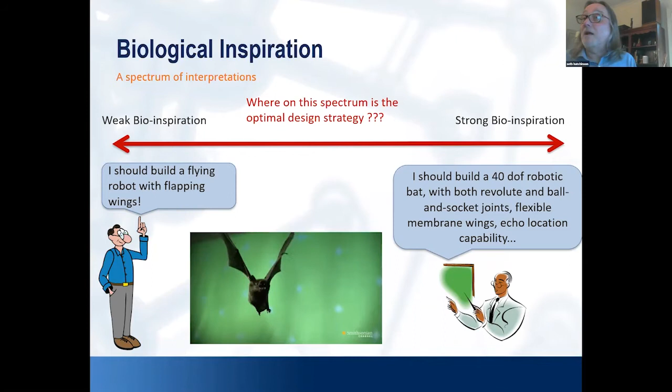At the other end of that spectrum, you have people who are very serious about the biological motivations. People who are studying the animals very closely, maybe even dissecting animals to look at the specifics of bone structures and musculoskeletal connections and how all these things go together to make the biological system work, and who try to replicate that. Right? So you have people that are working on robots that have muscle systems that are meant to mimic physical muscle systems. Quite often this is done with pneumatic actuators, for example. So you can place yourself anywhere on this spectrum, from very strong to very weak bioinspiration.

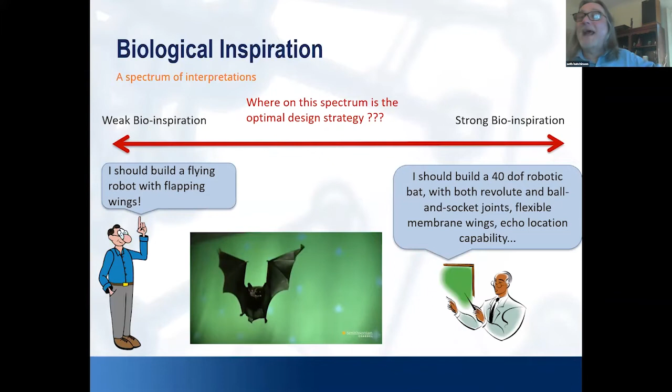And the question that comes up, I think that's interesting, is where should you be on this spectrum? Right? At what point should you move away from looking at the animal and start thinking about engineering? Or should you ever do that, right? Should you focus on the animal and its capabilities and its biological and mechanical structure all the way to the end? So this is how we looked at the problem for this biologically inspired robot bat.

It was first to step back and ask, you know, what are the right questions, right? What should we even be asking about when we look at the biological creature? And here are the first couple of questions, right? Should we try and really build a robot that is a replica of the biological animal? Or should we abstract away a lot of the details of the bat very quickly to a simpler kind of mechanical structure? And this raises immediately the question, well, then what are the salient features of bat-like flight, right? If you want to capture this kind of behavior, what are the right features to look at?

A question that I thought would be really important, and it is important, but not nearly as important as I expected it to be, is what's the role of geometry versus dynamics? And the question that I thought would be really interesting is, can you do flapping flight based purely on the geometrical structure of the robot and the wings and the trajectory? Can we ignore dynamics? If I study bats as they fly, and if I really understand the geometry of what's happening in the bat wings and the bat body and the trajectory of the body, is that enough? Or do I need to worry about the Lagrangian dynamics, right?

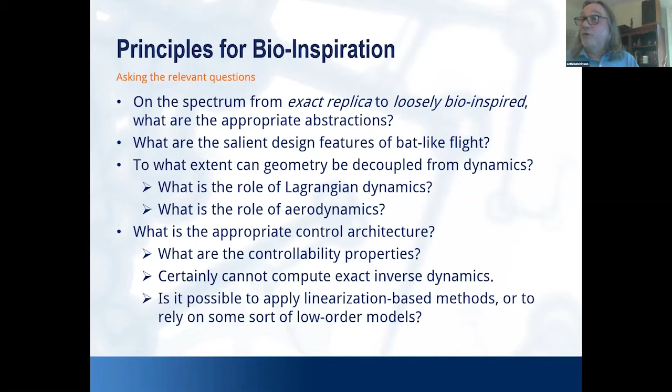And there are a few things that are obvious just at a first passing thought, right? You don't have to think very deeply to realize that you will not be able to do real-time control with exact inverse dynamics, right? You won't be able to solve the inverse aerodynamic problem in real time. So can you cheat, basically? Can you do the kind of cheating that control theorists do? For example, can you do linearizations that will get you closer to the kind of control that you need to get the behavior that you want?

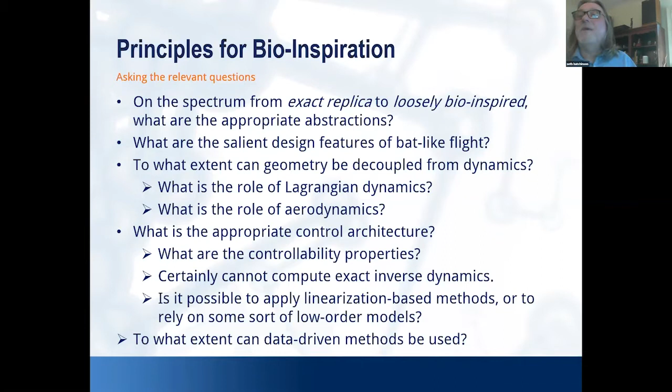And then finally, what about data? Data has been, in the last 5 years, finding its way into robotics quite a lot. In fact, if you look at the topics that are discussed at ICRA last week, it's not the #1 topic, but I think it's number 2, 3, and 4, the topics that are related to machine learning in their different manifestations. And so how can we do learning on the physical system, the biological system rather, to inform the robotic design and the robotic control? And this is the way I'm going to approach those questions in this talk.

So I'm going to begin just by looking at the bat, and by the bat, I mean the physical animal as it flies. What can we learn? What can we infer from looking at the physical animal? From that, I will posit some constraints on the design, and in particular, some constraints on the topological structure of the design. Once we settle on a topological structure, then there are questions about what should be the design parameters, right? What should be the values of the various kinematic parameters that go with the topological structure? Then once you have that, how do you optimize trajectories, taking into account aerodynamics, and then the control design?

Some extra stuff if we have time to talk about how we did a little bit of extra machine learning stuff on the back end to improve all that. But we'll see if we have time for that.

I seem to be rambling more than usual, so we may run out of time early today.

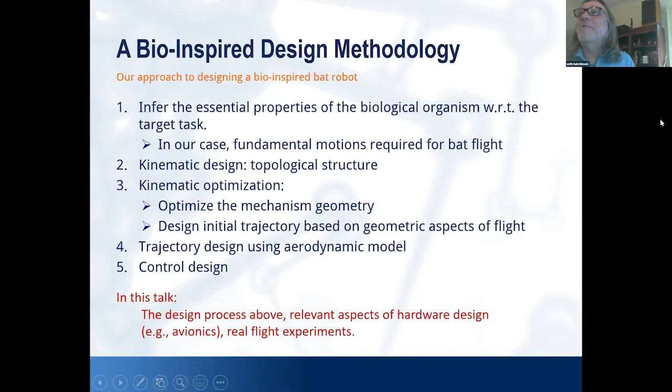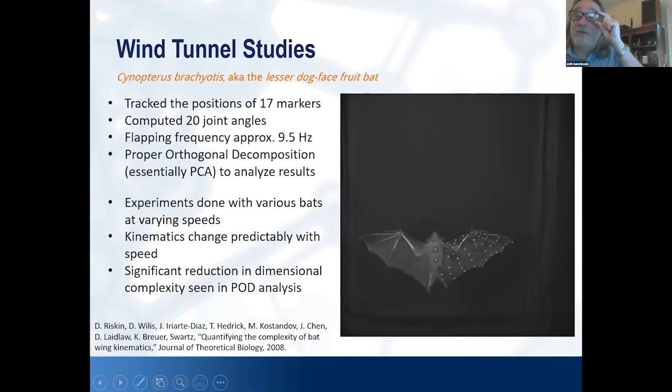And you put this into a wind tunnel with a motion capture system, and you collect data of the bat flying in the wind tunnel. And in this case, I think they used 17 markers, computed some inverse kinematics to get joint angles for the joints in the skeletal structure. The flapping frequency was about 10 hertz, 9.5 hertz, it says here. And then they did a principal component analysis. They call it proper orthogonal decomposition, but to us, it's more familiar as principal components analysis, to figure out what's happening with this bat as it flies.

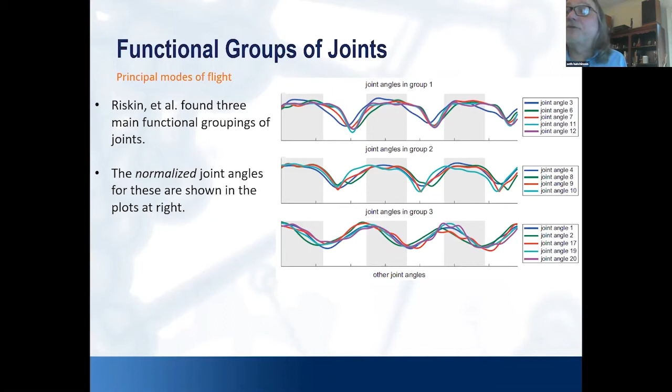And this is the data that comes out. This is not exactly true. When you look at these 3 plots, everything looks so perfect. In fact, to get these plots to look so perfect, you have to do some normalization, you have to do some phase shifting and so forth to get things to line up visually. But what comes out very quickly from the PCA is that there are really only 3 kinds of interesting things that are happening when this bat flies.

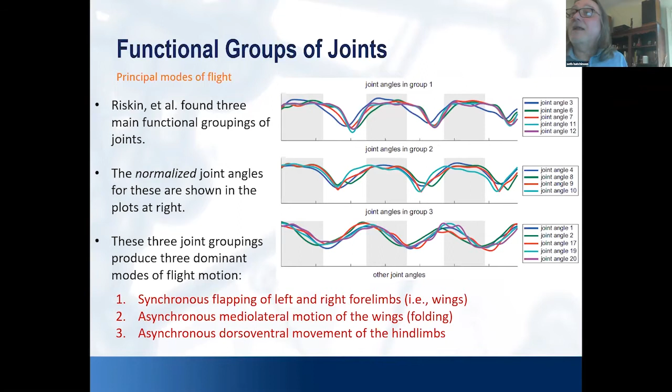There's synchronous flapping of the left and right wings. There's some asynchronous mediolateral motion, which basically means the wings fold in and out, right? So I don't know if you can see my arm well, but you get this folding motion of the wings. And then finally, the tail, the hind limbs move independently. So this is it. Everything that's interesting about the wing structure of the bat can be grouped into one of these 3 kinds of motion. And if you start there, you're now in a position to think about what should be the topology of the kinematic structure of a robot if the robot is meant to replicate these 3 kinds of motion.

And so the challenge is this: replicate those 3 kinds of motion, synchronous flapping, wing folding, dorsoventral leg movement, but with a lot of constraints. And the constraints are hard for engineers. Low weight, low power consumption, small size, structural stability. And basically the hardest things about this design come from the fact that when you throw it into the air, it should fly by flapping its wings. If it's going to fly by flapping its wings, if you know much about aerodynamics and Reynolds numbers and this sort of thing, it means it can't be very large.

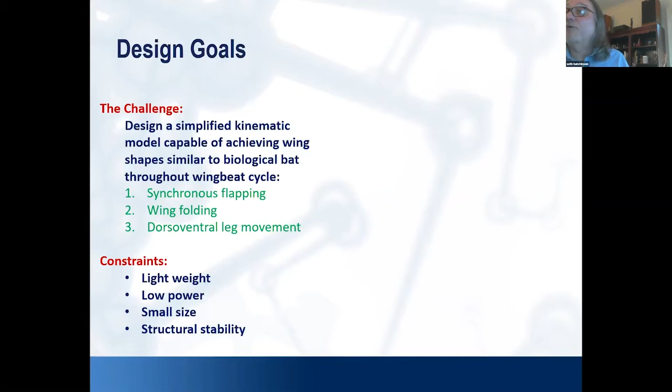If you don't want it to fall out of the sky, it can't be very heavy. It has to be low power because it has to carry its own power source with it. And if you have to put a giant battery on it, then there's no way for it to fly. And then finally, all these things fight against the structural stability, right? So when you flap the wings, you don't want them to break, right? You want them to be able to withstand whatever aerodynamic forces are applied when the flapping occurs.

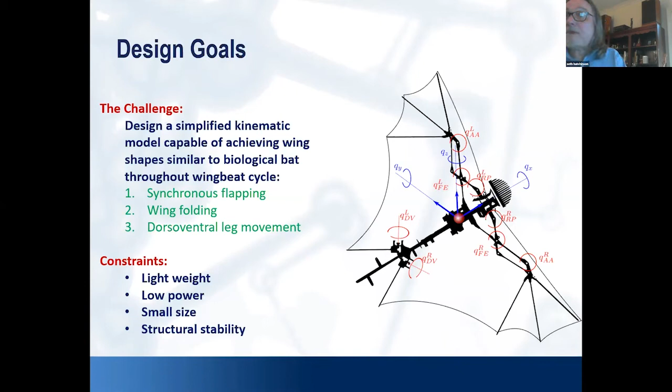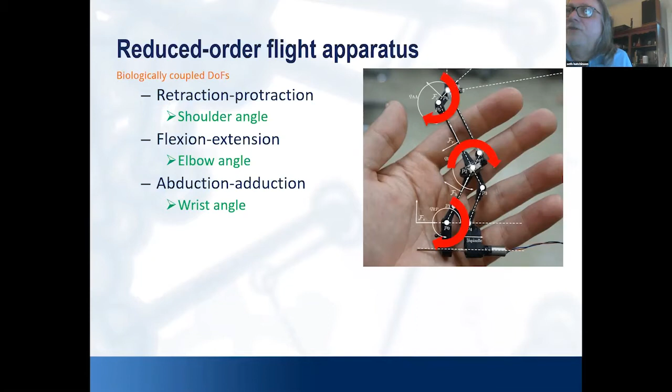This is what the structure looks like that we arrived at, right? So this is an a posteriori look back at the design that came out after some trial and error. The mechanical version of that is here. This is a Watt mechanism that you see. Basically, these 3 degrees of freedom are coupled so that when this linear actuator moves back and forth, these 3 revolute joints move in response as shown. And this gives us a way to fold the wing and the fingers in and out, coupled together, right?

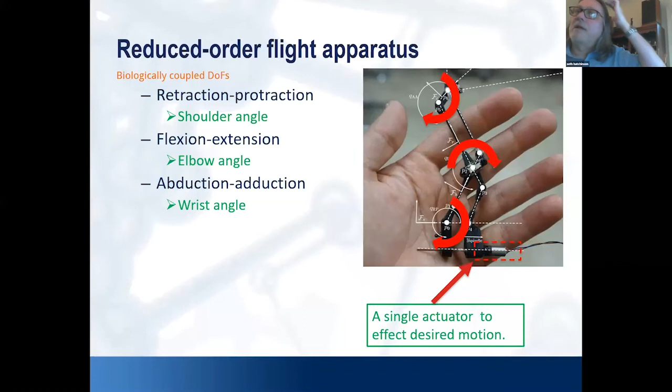So this captures the tight coupling that you saw a few slides ago. That really there's only 1 degree of freedom happening when this robot folds in and out. Can we build that into the mechanical structure? The answer is yes, and here's a mechanism that does that. This 6-bar linkage that you see is called a Watt mechanism.

It's a parallel mechanism, and the reason it's nice is the fact that it is a parallel mechanism, and that gives it structural stability to support forces perpendicular to the wing, right? So when the air pushes up, this parallel mechanism is able to resist that, and it doesn't bend or break. It's all done with carbon fiber tubes to get extra structural strength.

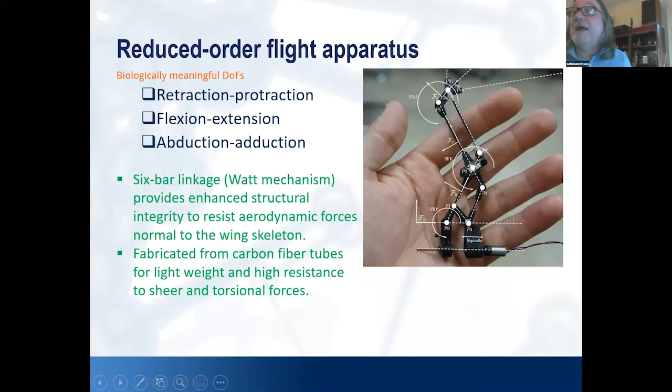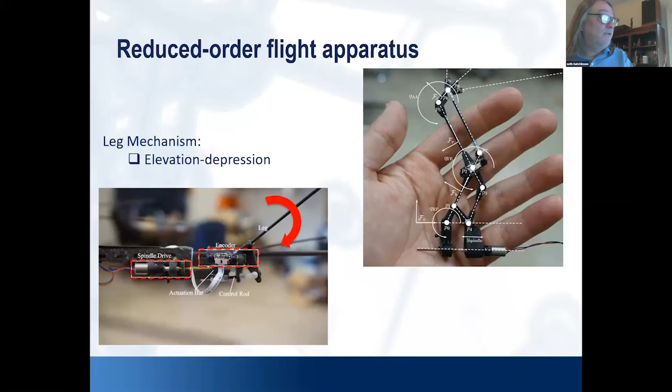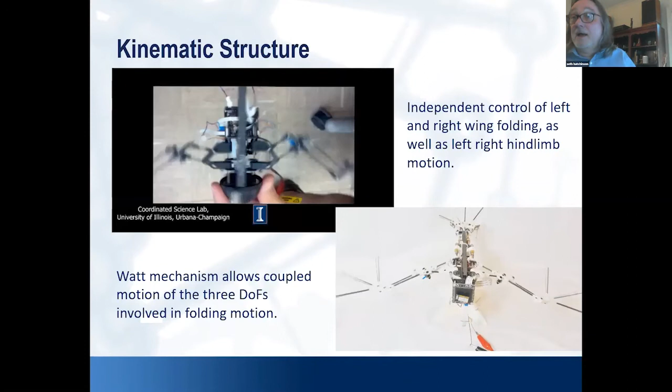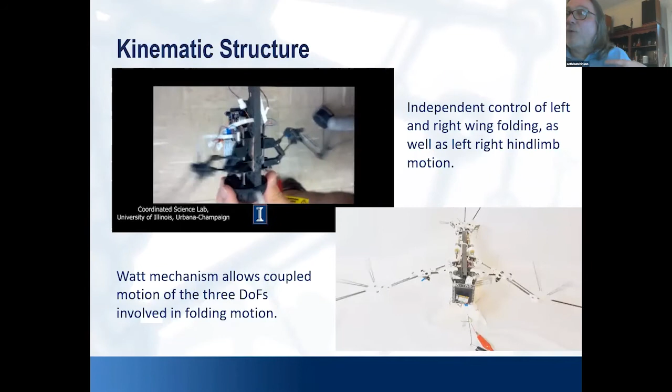And in the bottom right, you can see what are the actuated degrees of freedom and how can we control them. Right? So you see, as the thing on the left or on the right, as those wings move, it's one actuator, one linear actuator that's moving. And as it moves, the entire shape of the wing changes in response.

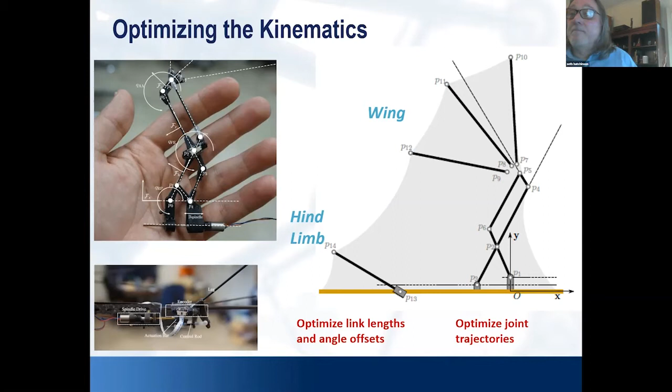All right, so let's talk about now that you've got the topology, how do you design the kinematic structure, right? What should be the size of each of those links, and what should be the offset angles? And then once you have the physical structure designed, what should be the trajectories of the actuated degrees of freedom in order to achieve flapping flight?

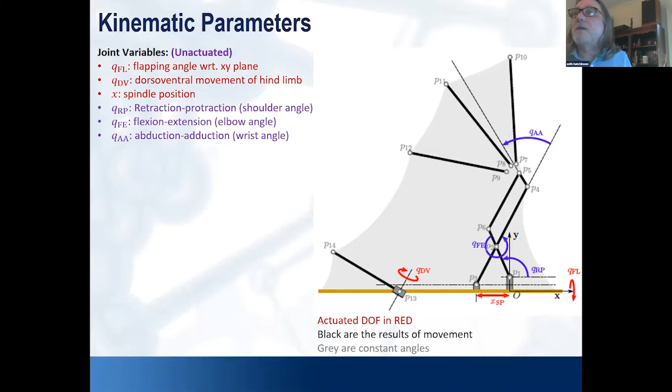So here's just a very quick, and it's not important at all to remember any of this stuff. Just remember the groupings. You have 3 actuated degrees of freedom. You can flap the wings, you can fold the wings, and you can move the tail. You have 3 passive degrees of freedom that respond, right, that are coupled with the actuated degrees of freedom, and you saw those a couple of slides ago. And then you have a pile of kinematic parameters that you have to design.

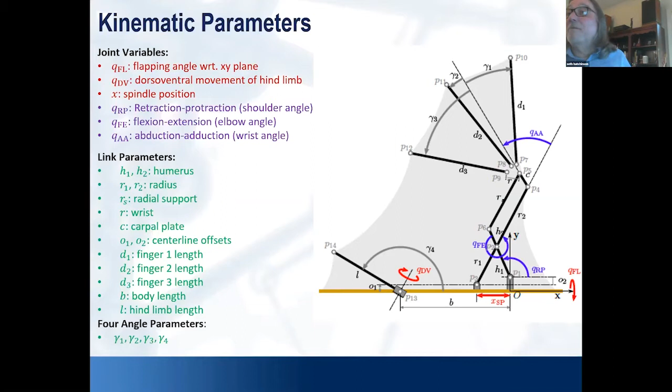And if you're a manipulator person, you can think of these as being just sort of fancy versions of Denavit-Hartenberg parameters. Right? There's really not anything more happening here than that. And so the questions are, what should these link parameters be? Right? What should be the angles between the fingers? And these are constants, part of the mechanism once you design. So how do you decide that? And the answer is this.

We're going to decide what those parameters should be so that the geometry of the bat wing is the same, I'm going to say the same in quotation marks, to the geometry of the biological bat during the flapping flight. Now, obviously, it's not going to be the same in a point-to-point exact transformation way. We want to capture the sameness in some abstract way that captures the salient aspects of the geometry. So we have to learn what the salient aspects are. And how are we going to do that?

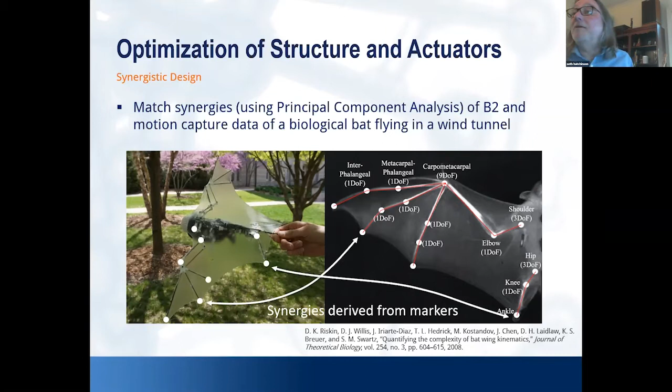Well, we have markers on the bat. You saw those a couple of slides ago. For every possible design that you can imagine, you can immediately write down where would be the markers on the robot that correspond to these markers on the bat. And so now you can look at motion capture studies of the bat. And this one's here just because I think it's really beautiful.

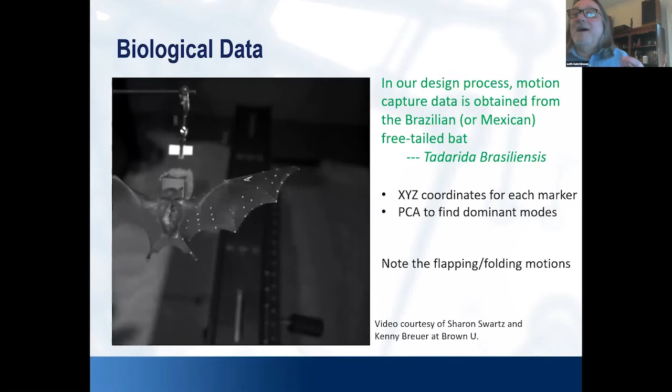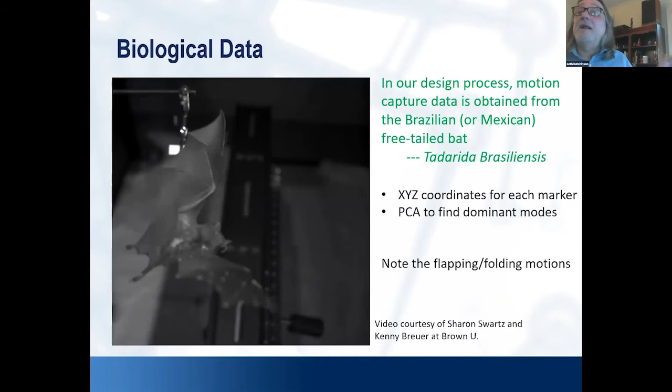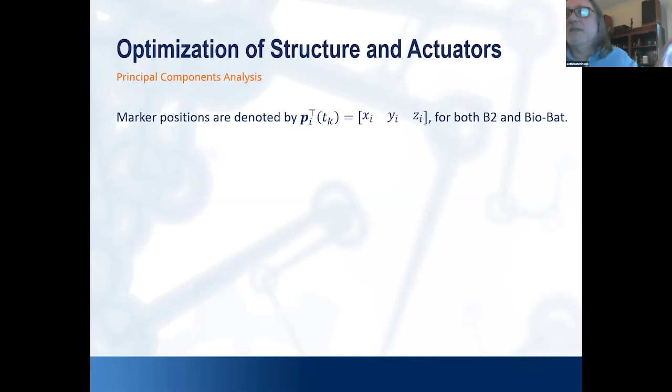You can see what's the trajectory of each XYZ point on the biological bat, do some sort of principal components analysis on that to reconstruct the shape of the wing as it evolves over time, and then try to design the mechanical system to replicate that as best as you can. And the way that we did that was to place markers on the robot. These are not real markers because this is during the design stage, right? So it's where the markers would be if the robot were designed in a certain way.

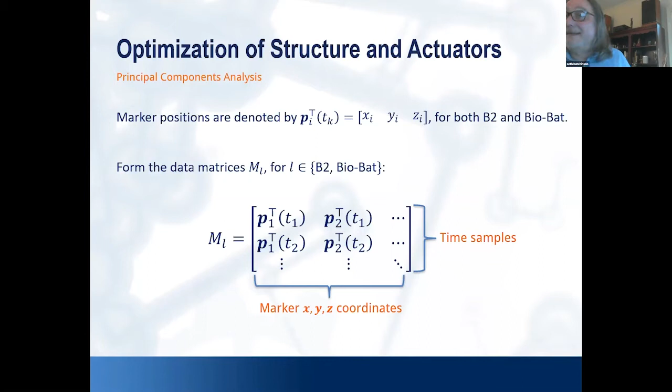Collect up for a particular trajectory the positions of the markers as a function of time, right? So each row corresponds to a time sample, and each column corresponds to the position of a particular marker. And then we do that for both the biological bat, where we just capture that data and store it, and then for the simulated design that we're looking at any particular moment.

That matrix, it's a big matrix, and it doesn't have nearly as much information in it as it has entries. So what can we do? We can do a singular value decomposition of that matrix, truncate the singular values. I think we used 3 in the end. Set the rest to be equal to 0, and then reconstruct the parameters of the motion and of the geometry in terms of that truncated singular value matrix.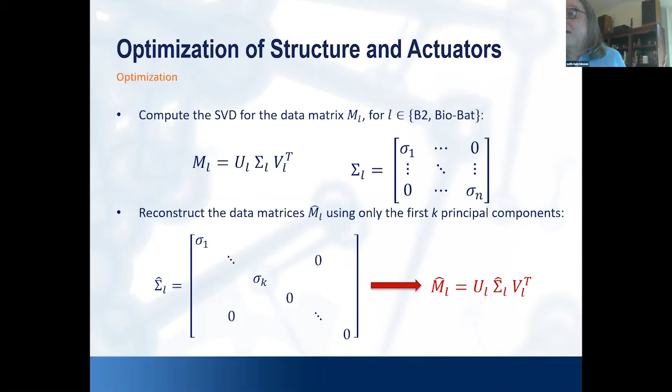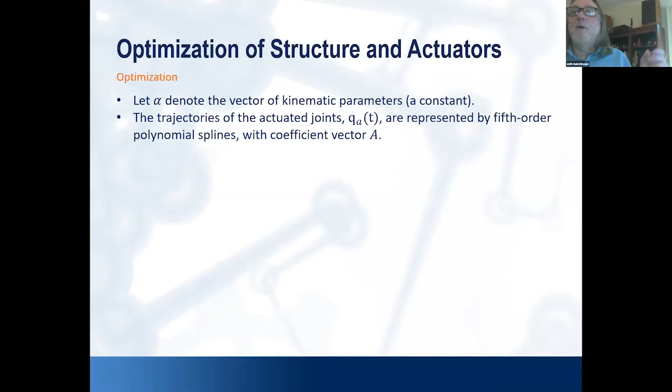And then the question is, what should be the design parameters for the robot such that the truncated matrix for the robot matches very well the truncated matrix for the biological organism, for the actual bat. How do you do that? First, there's a bunch of parameterization, a bunch of design constants for the mechanical structure, a few time varying parameters for the trajectories that we just modeled as low order polynomials, 5th order it says here.

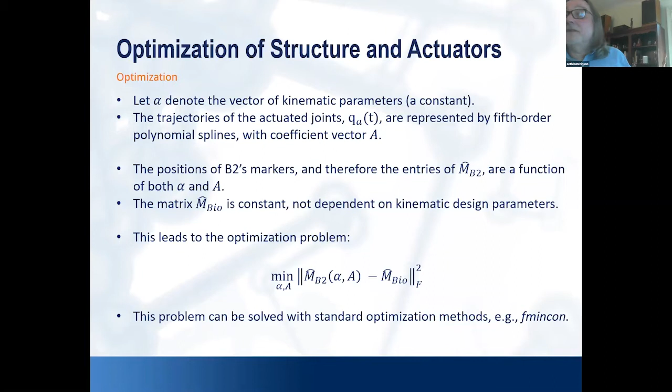Now if you know the trajectories, you can reconstruct the trajectories of each marker, both for the bat and for the robot. And it's just an optimization problem, right? So minimize the Frobenius norm between the 2 truncated data matrices over the trajectory, where the optimization variables are the constants of the mechanism and the coefficients of the polynomials for the trajectory.

And if you do that, this is the kind of result that you can get. On the right-hand side is a reconstruction of the flapping flight of the biological animal, right? So this is reconstructed by triangulating the data that we got back from motion capture from Kenny and Sharon. And on the left is the robot structure. You can see the wing, the Watt mechanism, the parallel mechanism folding in and out as the flapping occurs.

And so this is the moment when I thought a few years ago, if you build a robot and throw it into the air, it should fly because geometry should be enough. And at this moment, I will tell you, I was just really, really wrong. If you throw the robot into the air, it crashes almost immediately and quite spectacularly. And you realize that that hypothesis just doesn't work.

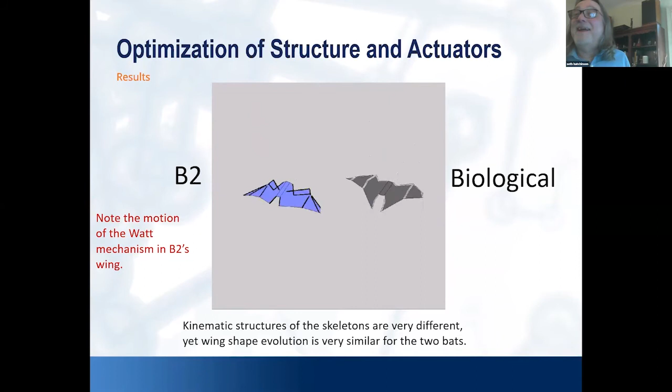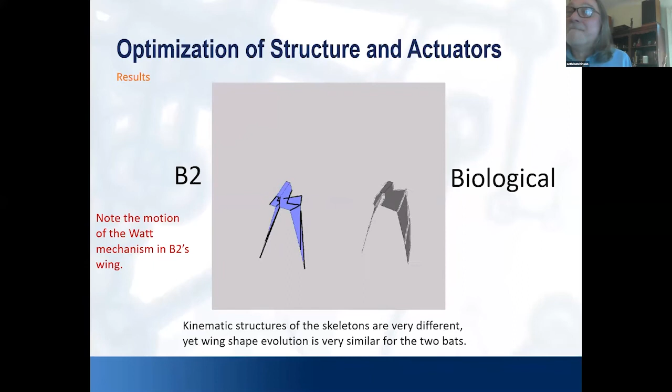And so as a robot motion planning guy who had studied geometry for a very long time, I was quite disappointed to find out that now, as an old man, I had to go back and learn aerodynamics and Lagrangian dynamics of the system, which I'm going to talk to you about in a moment. But first, I'm just going to show you quickly the prototype hardware. So here's the robot. There were a number of variations on this.

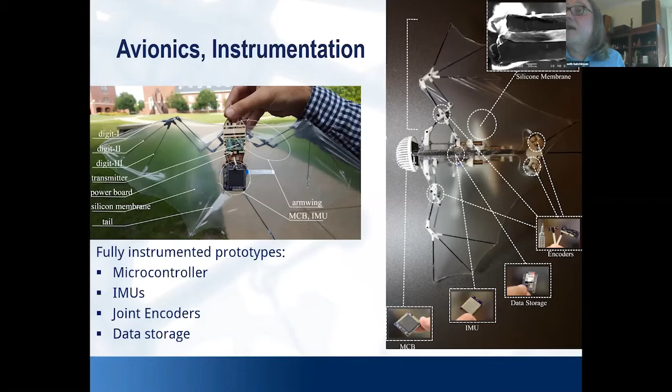Just to give you a sense of the difficulty of the design, there's a lot of stuff in this robot that has nothing to do with the mechanical flapping, right? There's an IMU, there's data storage, there's a microcontroller, a lot of avionics equipment that goes in addition to tiny motors and encoders and all of that stuff. You've seen some version of this a minute ago.

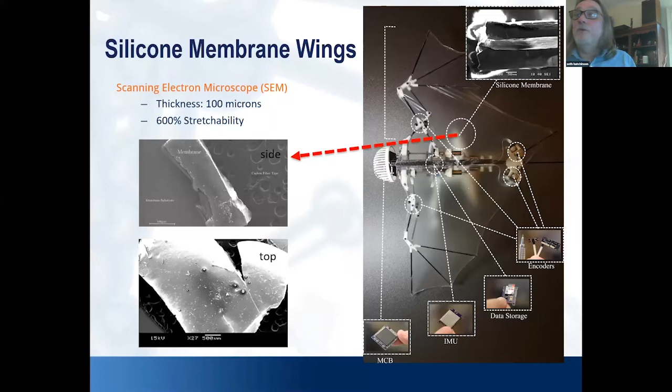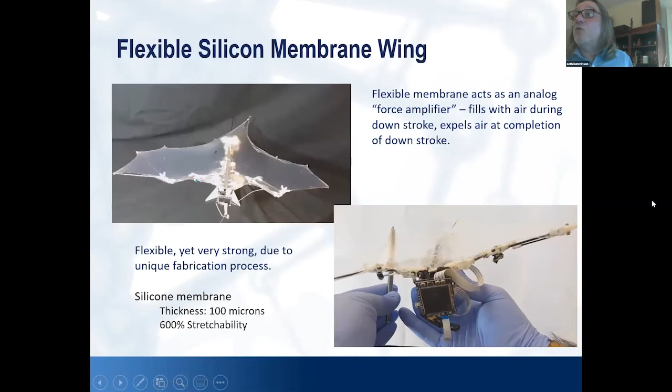And what you get when you do this is something that is similar, at least to a first order, to what happens in biological bats. Namely that when the bat flaps its wings, the membrane of the wing deforms, it fills up with air. And then at the bottom of the downstroke, the membrane pushes that air out. And you get this force amplifier in the aerodynamic world that comes just from these passive dynamics of the membrane structure. And so it's a very cool property that we were able to exploit, I think, as well in the robot design.

So now I'm going to talk really quickly about trajectory design. And the thing that I think is most important about the next bunch of slides, many of which I'm going to skip over very fast because the details are not that important, is this. In the end, you have to figure out something about aerodynamics and the Lagrangian dynamics of this system if you want the trajectory of the robot to behave well. And basically, there's a line that you draw on the spectrum from data-driven approaches to engineering with sophisticated mathematical models approaches. And where do you draw that line is an interesting question.

And the answer for us is you draw that line right here, right after you've done the geometry and designed the mechanism. The question immediately should come up, well, why? Why do you draw the line there? And the answer is really simple, because at this moment, we have used everything that we can measure. So we don't have the capability to measure what's happening in terms of the structural biological bat as it flies, how much force is being exerted on the shoulder or on the elbow or on the membrane.

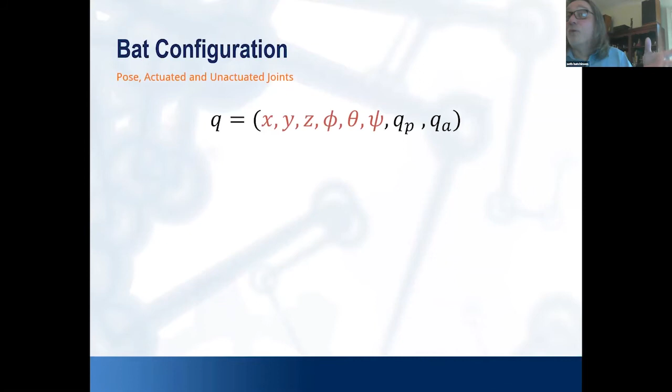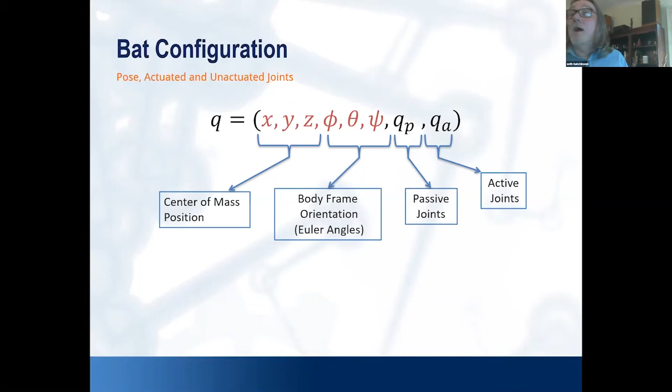And the mathematical model is the usual one. You have a system that's just defined in the configuration space in the usual way. You can think of the torso of the bat as a rigid object. So the usual rigid body dynamics are there, X, Y, Z, and 3 angles. There are some passive joints, and then there are a few active joints. And in our case, just a few, right? The 3 that I showed you, but for both sides of the robot. So half a dozen actuated degrees of freedom.

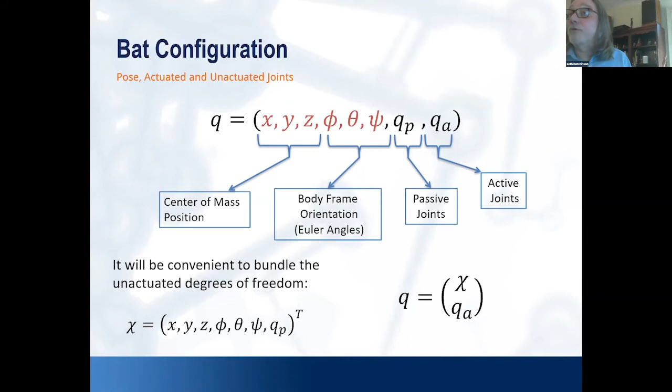And in the end, you can bundle those up nicely into a configuration that has a bunch of configuration variables over which you have no control at all, and a few configuration variables over which you have complete control, right? So you have complete control over the actuated degrees of freedom. They respond to the electricity that you send to the motors. The nonlinear model of the dynamics is pretty similar to what you see when you look at robots.

Let's see if I can do this. Yeah, so you have this stuff, which is your usual Lagrangian dynamics of the robot, right? M, C, q dot, G, q: that's acceleration terms and inertia matrix, Coriolis terms and gravity terms. And then you have this, which is the torques that you put in to the motors, right? So all this stuff is in any textbook on robotics. But you have now also this stuff, these forces that come from aerodynamics.

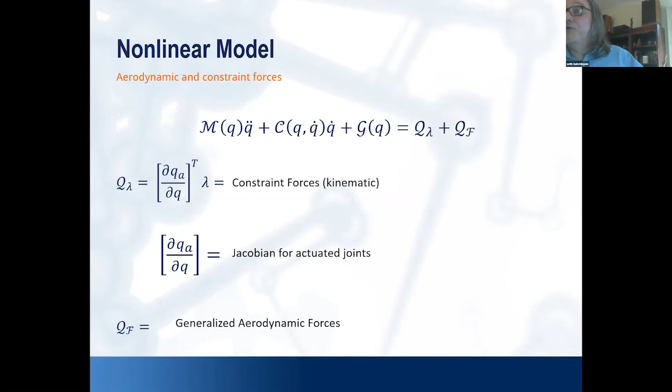And the problem with the forces that come from aerodynamics is that they depend on the accelerations and the velocities of the configuration parameters. So you cannot decouple the aerodynamic forces from the input forces and torques, or from the configuration parameters in a nice way. Right? The torques going to the motors, you can decouple from what's happening in terms of accelerations and velocities. I put in more electricity and I get more torque, and that's that. But the aerodynamic performance depends on what the wing is doing in a way that doesn't give you that clean decoupling.

So I'm going to skip this, but it's just to say that you can rip those equations apart. You can use a very simple model of aerodynamics. And this may not look very simple, but it is. I'm modeling each wing as a big flat rectangle so that I can easily integrate the forces over the surface in a way that is computationally super tractable, but not particularly accurate in terms of what's really happening.

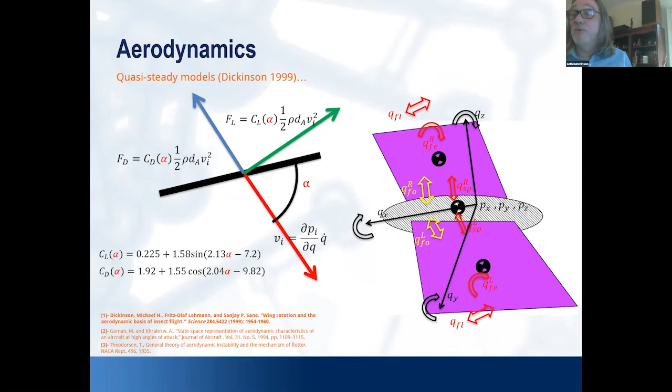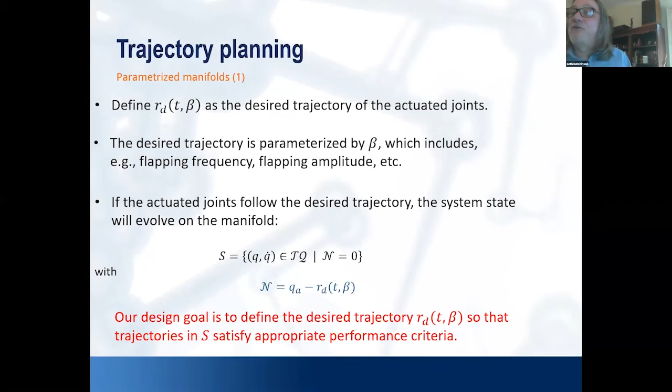And then I'm going to do trajectory planning, which is put in the variables for the actuated degrees of freedom and see what happens. I'm going to skip this stuff. It's just some nuances about how to deal with constraints to keep this robot flying on the right manifold. The part that's interesting, I think, once you get past the mathematical modeling stuff, is how do you do the trajectory optimization?

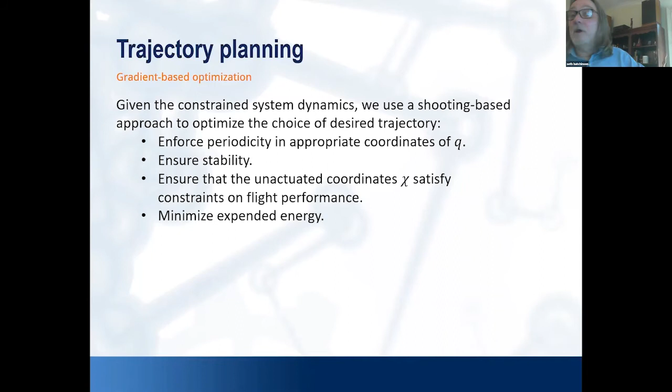And the way we did it was just numerical methods, right? So we have the models that I just breezed over, but you can write them down, you can solve them numerically. And now you enforce some constraints, right? You want stability, periodicity of the motion. You want to make sure that the unactuated coordinates don't correspond to trajectories that fall out of the sky. You'd like to minimize the energy that's being used. And you can do all this stuff in a straightforward way.

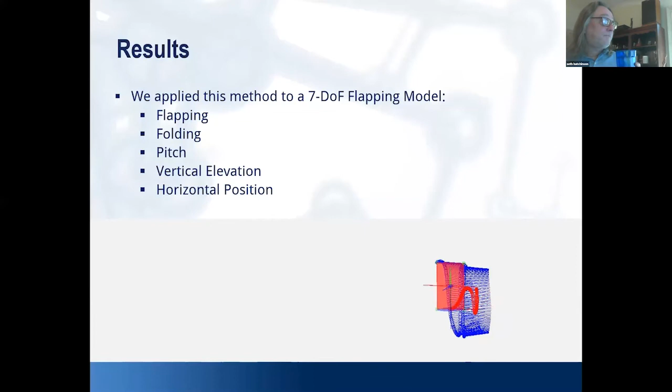We did this basically with shooting-based methods. And here's the kind of trajectory that comes out of the optimization process, right? So what you're seeing here is simulation.

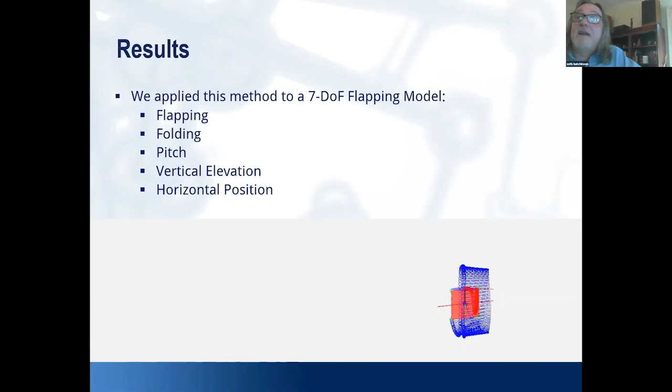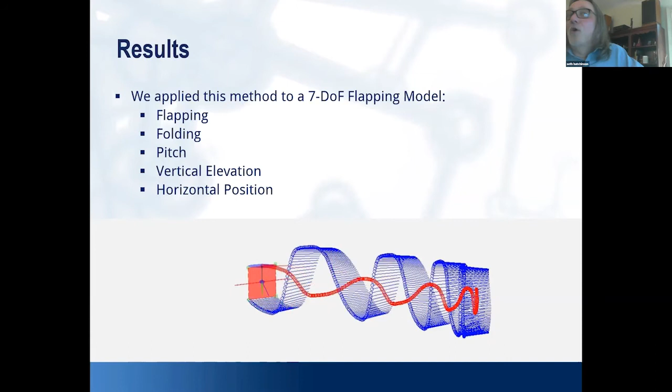And so now the question is, if I can simulate this, right? If I can optimize the trajectory, and this is what the simulated system looks like. Well, the simulated system is pretty simple. Right? It has just like 7 degrees of freedom to it. So when I try to make my real robot follow this trajectory, what do I have to do? And the answer is you have to design a controller to track that.

And the way we do control design, I think I'm not going to succeed to teach you about the method of Poincaré in 5 minutes. And if you already know the method of Poincaré, then that would be 5 minutes that are wasted. So let me just tell you this. You can think about dynamics as being continuous, right? A system evolves continuously over time, and you can write those equations down. I showed them 15 slides ago. I showed you the dynamic equations of the system.

Another way to think about the dynamics is to think, let me just look at the system at discrete moments of time. And in legged locomotion, this is a very popular thing to do. And the discrete moment of time when you look at a running robot might be the moment when the foot hits the ground, right? So I'm only going to look at the robot when the foot hits the ground. And then the next time I look at the dynamics, it'll be the next time a foot hits the ground.

And we can do the same kind of thing with flapping flight, where we look at the system dynamics at the bottom of the downstroke, for example. Or you can pick any moment that you like. We picked the bottom of the downstroke. And so when I do this controller, I'm going to look at, here's where I am right now at the bottom of the downstroke. What do I need to do to the control input so that after the wings go up and come back down again, my system will be better than it is now in terms of its dynamics? Or I want to improve some kind of characteristic, get closer to a desired trajectory, for example, right? So that's how I'm going to think of control design.

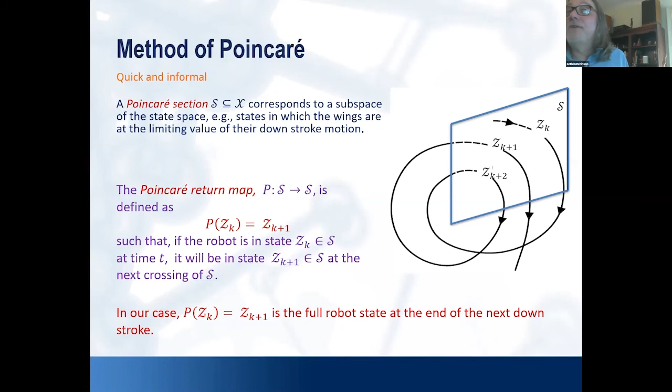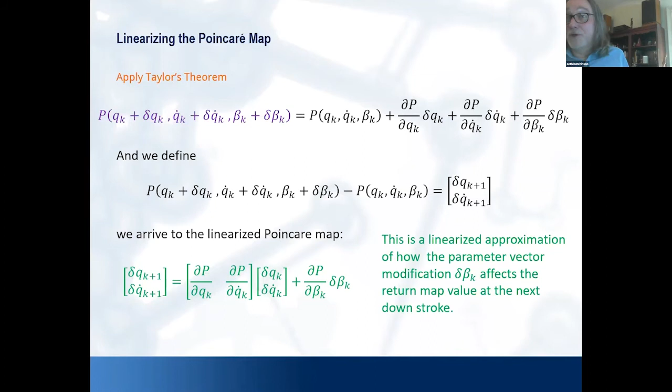And the way to do that, let's skip this, is just to say, I can take that mapping from this moment in time that maps me to where I will be the next time I hit the downstroke. That's called the Poincaré map. I can linearize the Poincaré map, right? And there's some mathematics involved in that, but really, in the end, it's just a linearization of this complicated map. The system dynamics that are linearized are shown in green, but really they look just like any other x dot equals Ax plus Bu, where the control input u is here delta beta_k. And so I can do feedback controller design. And in fact, that's what we did. We did an LQR design where we linearized about the desired trajectory.

And so it's disappointing, I think, in some ways. Let's see if I can do, where did it go? Pointer options. This matrix K, in an ideal world where computers are super fast, you would dynamically compute this gain matrix by solving the LQR problem in real time. But in our world, all those equations are much too difficult to solve in real time on the processor that lives inside the robot. So we did a static control design around the linearized version of the trajectory, basically.

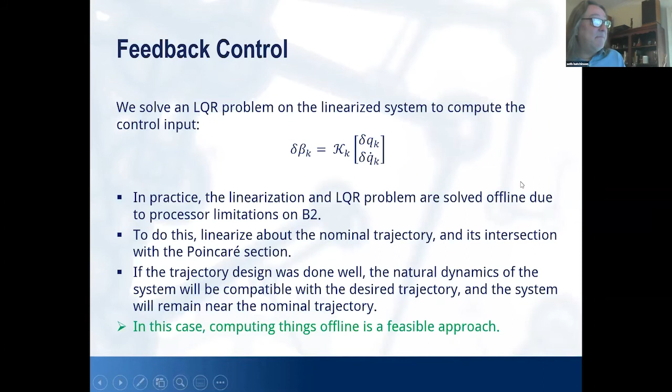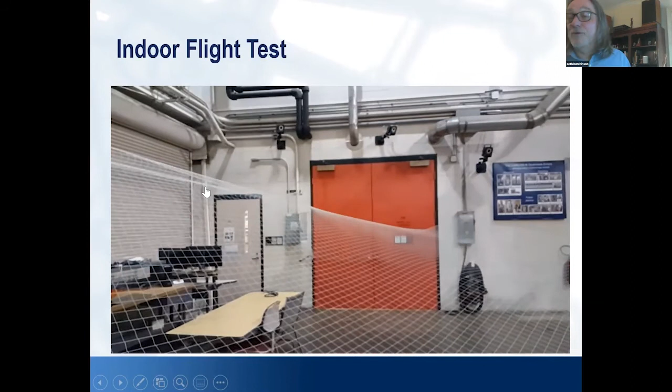And if you're linearizing about a desired trajectory when you design the controller, that design approach assumes that the robot will be, when it's actually behaving in the world, somewhere near the desired trajectory. If not, the linearization doesn't make any sense, right? So it's important that you start this robot with an initial trajectory that matches very well the trajectory that you used for the linearizations, right?

And so part of the reason that this approach works so well in practice, so when you look back at this result, this is a really nice result, and it's controlled, right? It's not a robot that crashes at the end. It's a controlled soft landing. The reason it works well is because we linearized about a trajectory, but then we made sure that the robot started out on that trajectory.

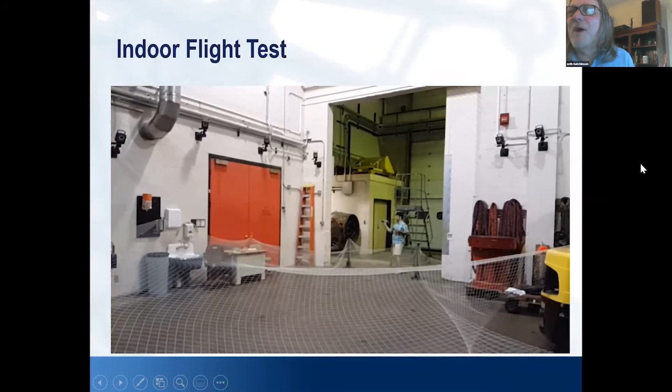And so there's some engineering work and also some work at the time of doing the experiment to ensure that you match the conditions that you designed for. Right? So I'll show you this one more time. And again, you see that we're far too optimistic in the placement of the nets, and the robot flew much faster and further than we expected, as usual, smashing into the wall. So that's what you get using a very simplified aerodynamic model.

I've got about 5 minutes left that I'm going to spend talking about how to do even better than that. You can do better if you have better models of the aerodynamics and of the control surfaces that you use to control the aerodynamic response. So instead of just modeling each wing as a big flat surface, I'm going to make the control surfaces slightly more interesting, give them a few more degrees of freedom.

That means I need to be able to somehow understand the relationship between those control surfaces and the aerodynamic forces that result. In order to do that, I'm gonna do data collection, right? And really use some machine learning kind of approaches, not the deep neural network kinds of approaches, but just the parameterized model and parameter estimation kinds of approaches.

Then for the optimization, instead of doing the numerical integration stuff and numerically calculating gradients that we use for the methods that I just showed you, we used here direct collocation, which means you make some pretty strong assumptions about how you can parameterize and represent the trajectories.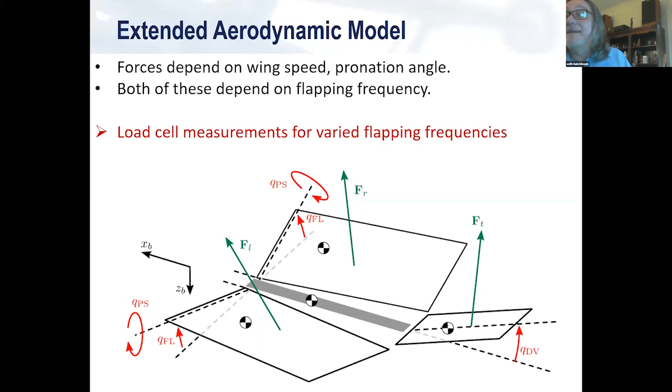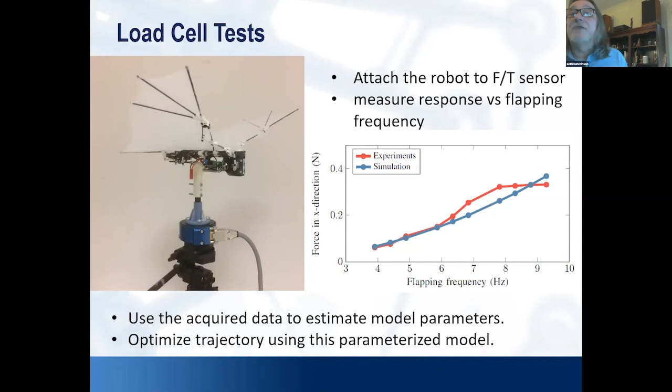And then we strap that robot onto a force torque sensor, basically a load cell now, so that we can measure the forces and the torques that come out as a function of things like the flapping frequency. Here are some experimental results that we get. These results come from motion capture on the robot compared to the simulation. Simulation shown in blue, motion capture shown in red.

And something that's cool that almost never happens in real robotics is that our simulation, you can see the blue curve and the red curve are not the same. And for one of the few times in my life, the fact that the simulation wasn't that great turned out to be good for us. Why did it turn out to be good for us?

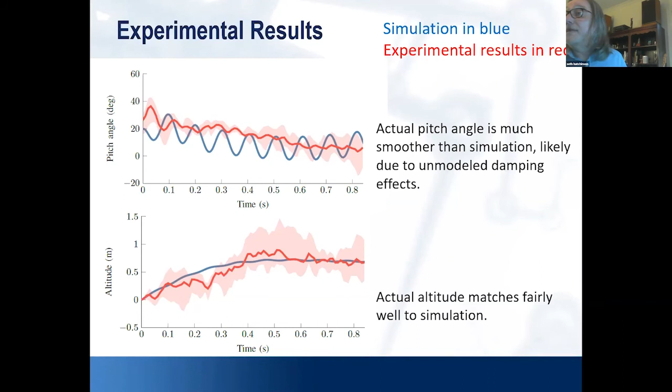Often you get high frequency dynamics that are excited when you do certain things that are really problematic. But in this particular case, it was the opposite. The high frequency dynamics got damped out by the physical system. I'll show you just a quick video that shows you, here's the load cell that we used to do the experiments.

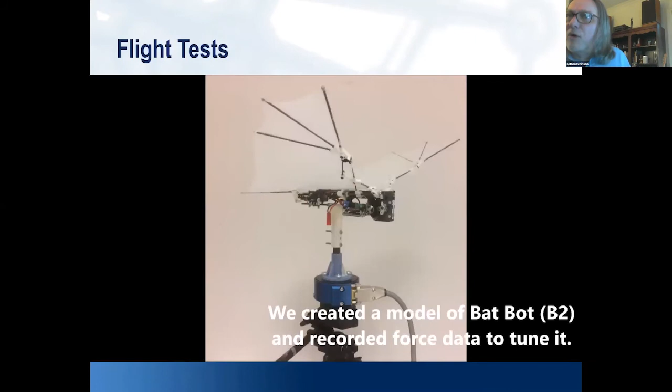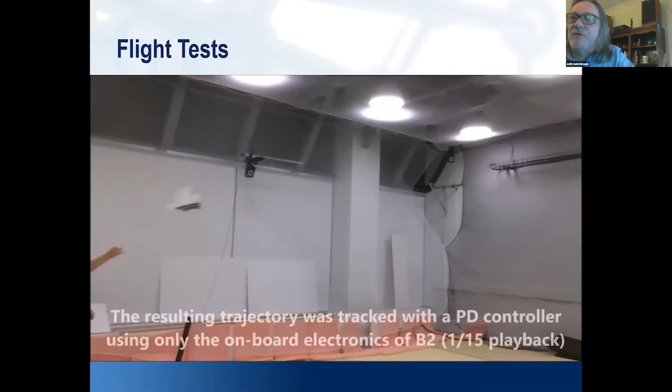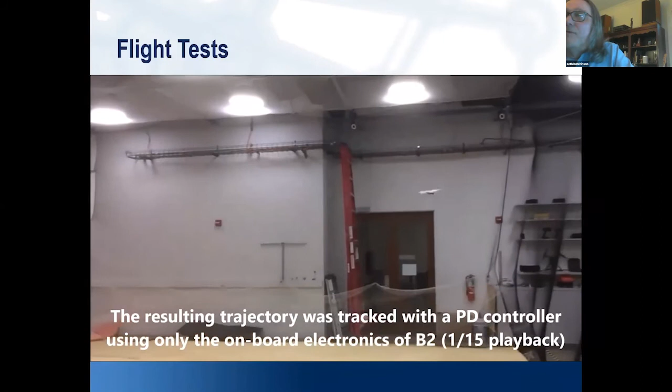And then when we did the trajectory optimization using the collocation method, we're able to plan these kinds of trajectories. And here's the robot actually doing this, following that planned trajectory to gain altitude. And now we've become more sophisticated in where we place the nets. We're placing nets vertically now to stop the robot as it flies.

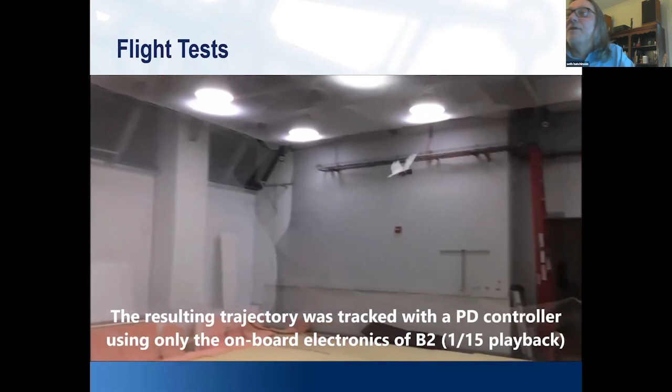Let me go back and show you one more time the launch. So you can see that the robot's gaining altitude as it flies until the moment that we turn off the wings and it coasts gently into the net. So we have a lot more control now and a lot more sophisticated trajectory planning algorithm as well.

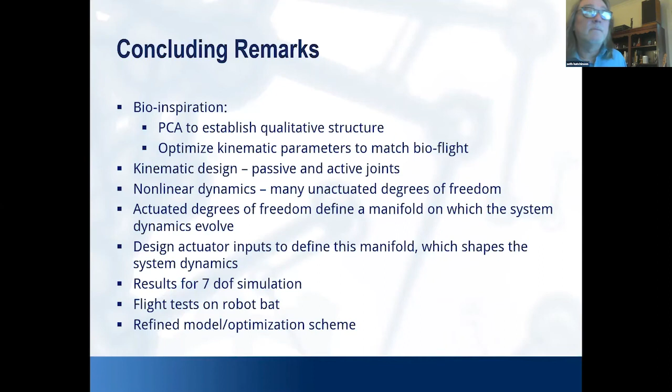Thanks. Diego? Hello, Seth. This is Diego Mercado from CIMAT, Zacatecas. I don't know if you remember me from MICAI. Yeah. We're having some good food there. We have really good food there. Okay, my question is... You're making me sad now, Diego. Come on, you're welcome to Zacatecas whenever you want.

Very interesting talk. I really like the problem because it seems to be very challenging, right? My question is if you have tried to perform some hover flight. We saw some videos with the bat hovering, like almost staying in place. And I feel like if you can hover and then transition into some kind of a steady trajectory as you already can, you can do very interesting stuff, no?

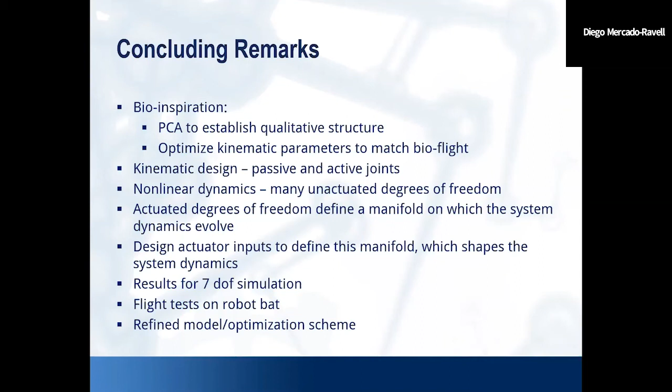It has the ability to do some rapid maneuvers. So we did some rapid diving maneuvers. I don't know if I have any videos in this PowerPoint presentation that show some pretty agile responses. But in the end, I think it's not necessarily so impressive to show the diving maneuver and to brag about, look, we can make our robot fall out of the sky faster than your robot can fall out of the sky. I'm not sure that that's something you really aspire to do.